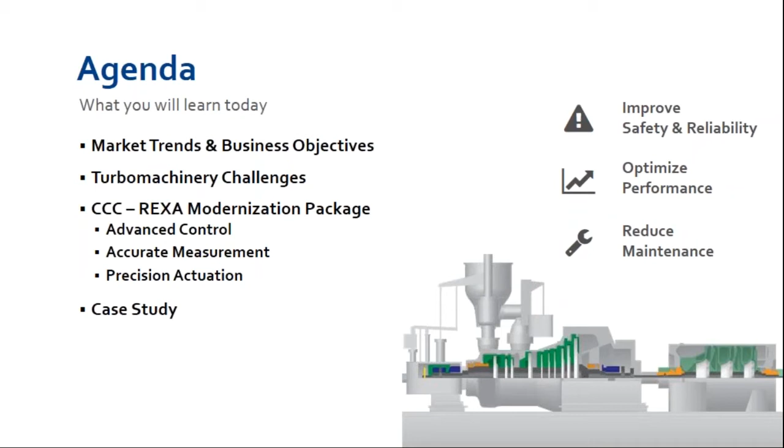Thanks, Mike. I'll start with the market background, and this is what we've all been experiencing, so it's just a bit of a summary. In today's volatile market, we've all been feeling the pain of lower oil prices for longer than before. Industry statistics are predicting that by 2020, half of the workforce will be retiring, and industry experts have even coined this as the great crew change.

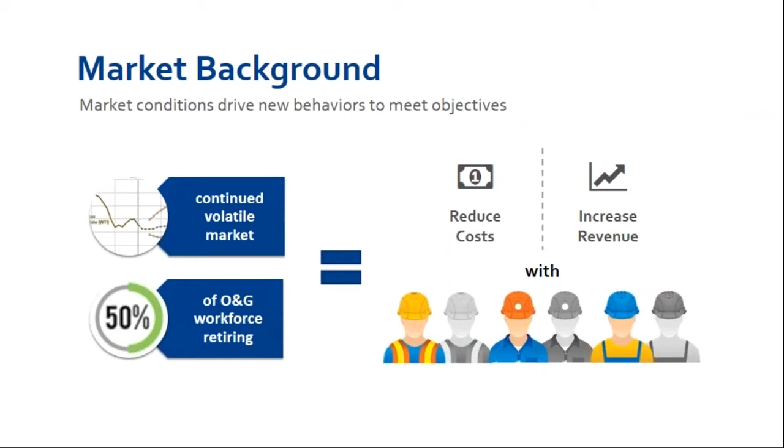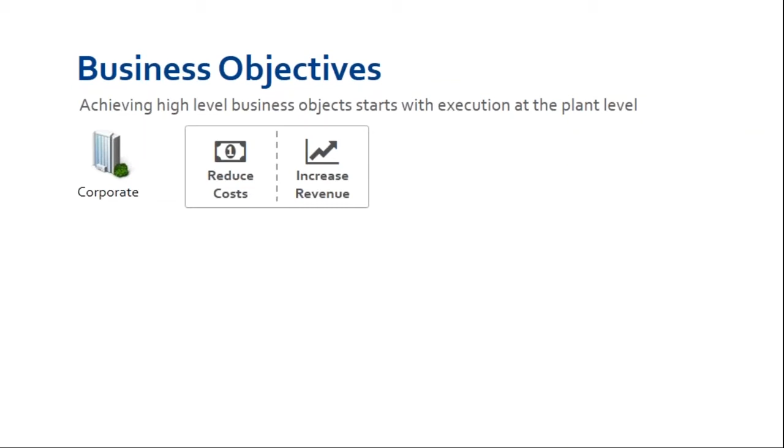So we're all challenged and tasked to do more with less. This means we have to be smart in the way we work so we can still achieve high-level business objectives with fewer people. The goal, of course, never changes, and that's always to be profitable. That means reducing costs and increasing revenue. Each plant sets their targets to improve, and that may vary depending on your industry, infrastructure, what type of standardization efforts have been in place, or even the age.

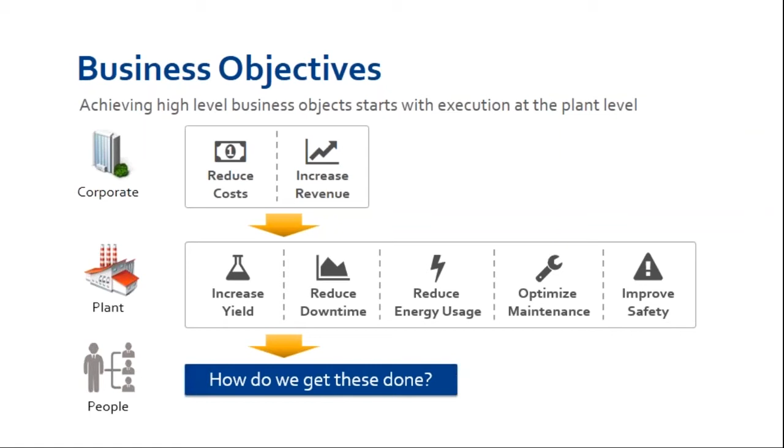So how you personally impact these goals in your daily job is what we'd like to focus on today in more technical detail. In the end, it's up to you, the people on the ground, to set priorities and execute these objectives. So in this webinar, we'll cover some strategies to achieve safer and more reliable operation and better performance while reducing maintenance. The focus, like Mike mentioned, is around some of the most critical equipment in your facility, and that is turbomachinery.

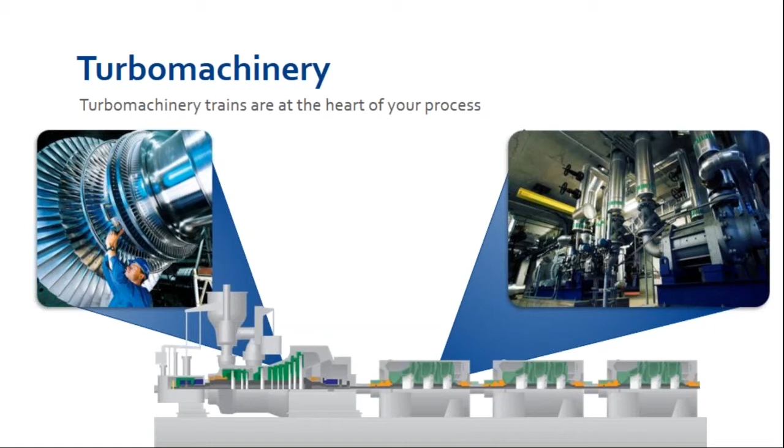To ground everyone before jumping into how to achieve your plant objectives, I'd like to define what we mean by turbomachinery. The train makes up both the driver and driven equipment. The driver could be a steam turbine, gas turbine, or a motor, and the driven equipment is typically a compressor, but it could also be a pump or a generator. Turbomachinery is at the heart of your process. Efficiency and availability of these machines directly impacts your bottom line.

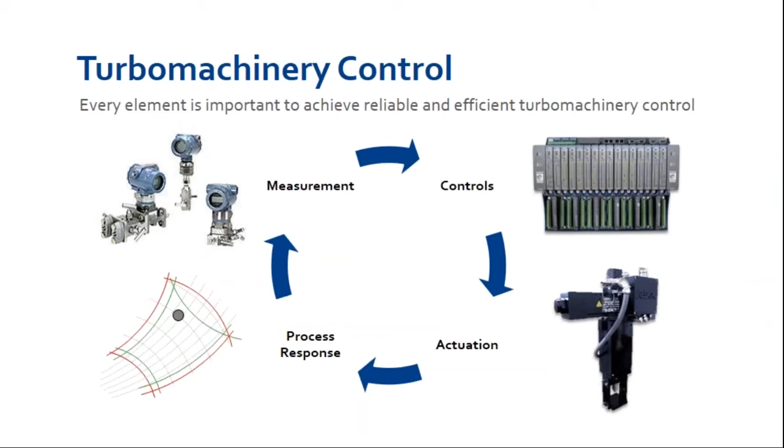Just like any control system, turbomachinery control consists of measurement, the control system itself, and the control element. A good turbomachinery control system keeps the process steady and provides protection to the machinery as well as the downstream processes in the event of an upset condition.

To understand the importance of these elements working together, think of this analogy: in a car driving down the road, you're taking in measurements between the lanes, the levels of gas and oil, the response of the tires on the road. The control system is analogous to your brain, making decisions about what to do next—do you step on the gas or slow down? The actuation responds just like pedals in a car, and they better work when you need them to in order to stay safe or get to your destination on time.

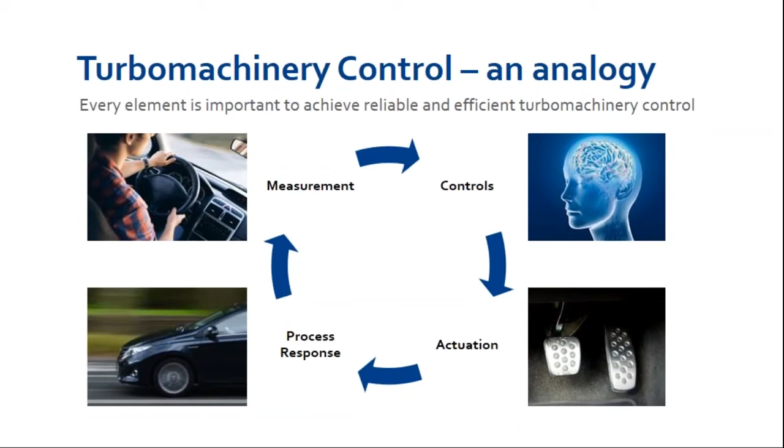The response of your car is the feedback from the process. Did your tires maintain traction? Did your speed increase when needed? Ultimately, did you stay on the road when the deer jumped in front of you, or did you have to pull over? These elements all work together, sometimes so fast you don't even think about it. The same is true for your turbomachinery control. Knowing where you need to go is the blueprint for how you design your system to work just the way you need it to.

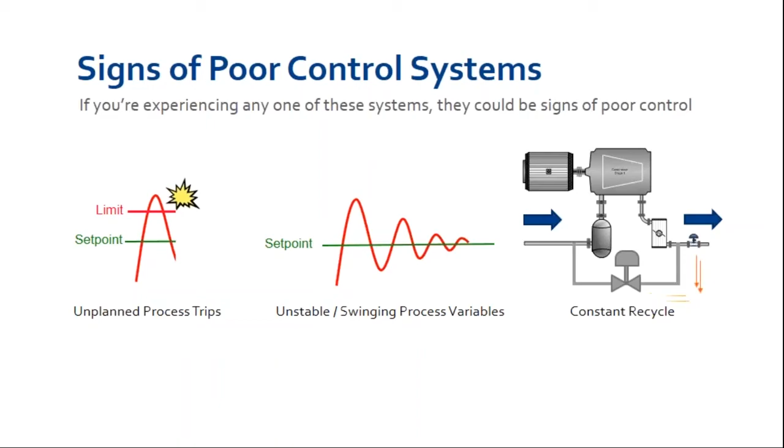Typical signs of poor control systems include unplanned process trips where specific limits are exceeded, unstable process variables when the set point can't be achieved quickly, and constant recycle. Addressing these conditions with turbomachinery control can lead to improved efficiency and availability. So how do we solve these challenges? We're going to dive into how REXA and CCC have teamed up to do just that.

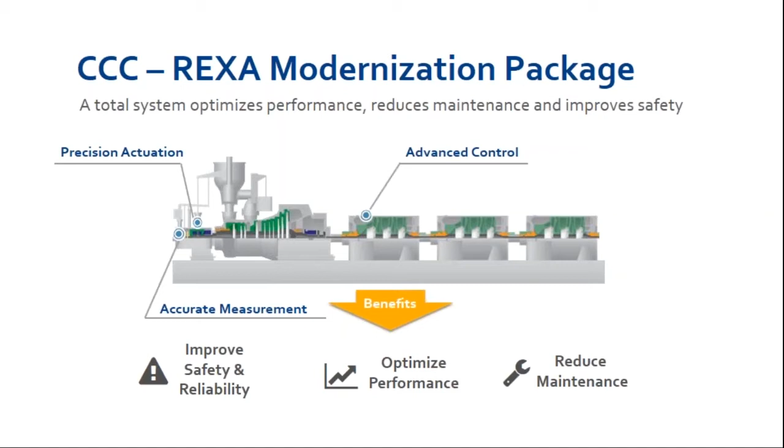The CCC-REXA modernization package ensures that all the critical turbomachinery control elements are working together seamlessly. We do this through advanced control, measurement, and precision actuation. Together, these technologies help you execute the plant priorities.

Starting with advanced control—this is the brains behind the turbomachinery control solution, just like our car analogy. Here is where you define how you need to operate to meet your plant objectives. By setting this up right, you can optimize performance in a number of ways: maximize availability, increase production, reduce energy costs, and automate startups. After reviewing the challenges associated with each objective, I'll also provide details on the key technologies required to get the results you need.

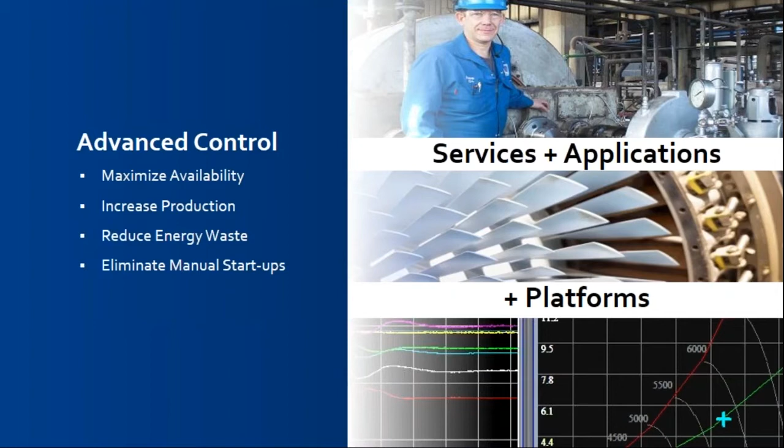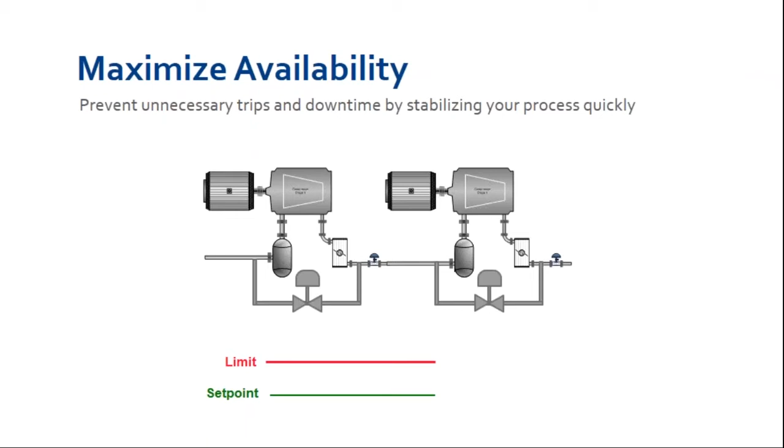Beginning with availability, it's important to understand the impact of tuning. Under-tuning or over-tuning systems can cause cascading trips in the process, leading to unplanned trips and low availability. Under-tuning typically generates slow and steady control, but could be too slow to respond to process disturbances, while over-tuning prioritizes quick response but compromises steady control and may even amplify disturbances. Getting this right is critical to maximize availability.

Here's an example of a disturbance affecting compressor operations. With general purpose control, shown here in red, the disturbance takes time to settle and has fairly high amplitude. This has two effects: the greater amplitude could result in a machine trip, for example, a high pressure limit being exceeded, and prolonged disturbances can create instability in the downstream processes. To minimize the amount of deviation from set point, a coordinated response of the anti-surge control, process control, and speed governor response is required.

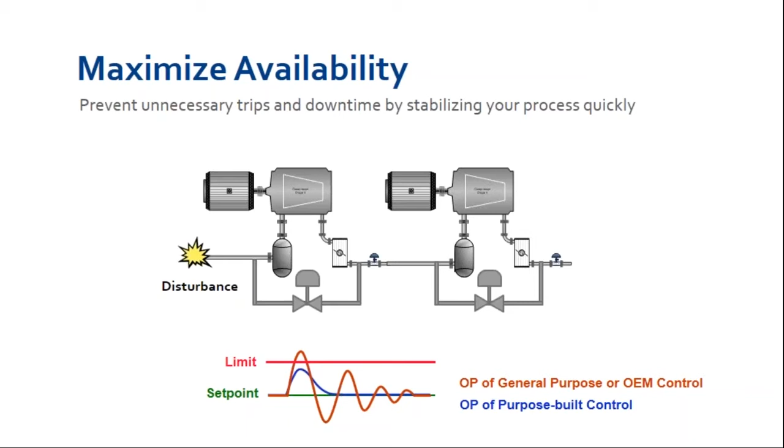A general purpose control system could take up to maybe 15 minutes to stabilize the process with large pressure swings. In contrast, a purpose-built turbomachinery control system can bring you back to set point within 2 to 5 minutes with a smaller amplitude, as you can see by the blue line in the process swing. This increases machine availability and minimizes downtime.

Not only does stable control allow you to keep your machine online longer, but it also helps you increase your yield. Consider the fluctuating flow of feedstocks—when the process is hunting for the set point, there will be unreactive chemicals creating unnecessary waste. With the confidence of stable control, the risk of exceeding limits is safely reduced, and your operating envelope can be expanded to truly optimize the set point limit for greater throughput.

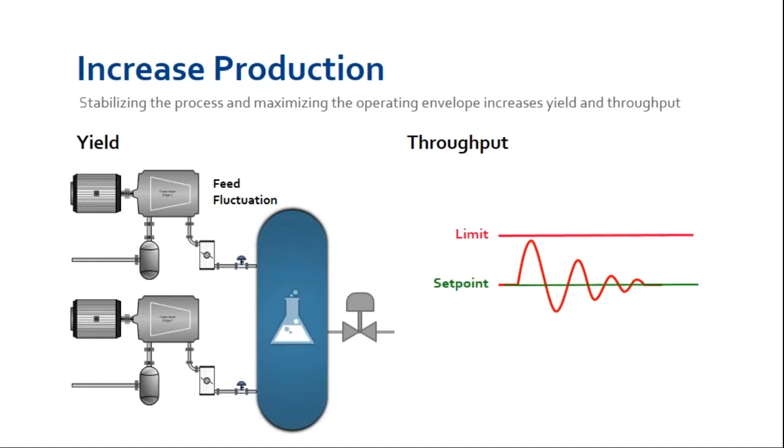To provide context, consider the compressor speed. We know that higher compressor speed equals increased throughput, but as time goes by, process resistance increases, such as intercooler fouling or hydrocarbon deposits in one or more compressor stages, and pressure limits require reduced compressor speed, ultimately lowering overall throughput. With a turbomachinery control solution, higher compressor speeds can be maintained by optimizing the set point limit for discharge pressure. You can see here there's a new set point limit and quantifiable payback, increasing your throughput.

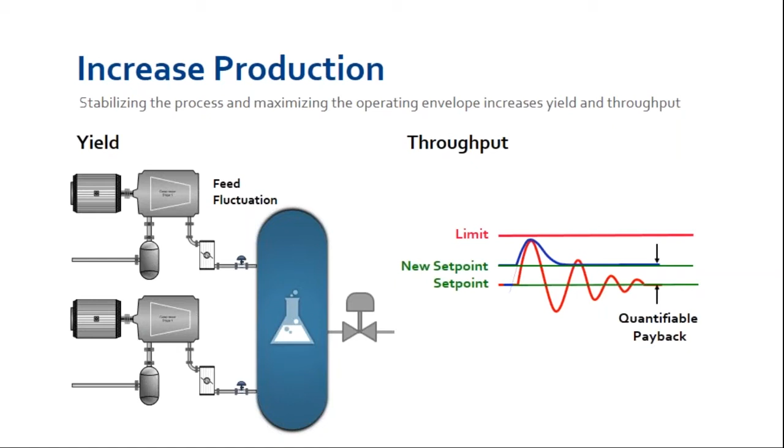Often we find that a wide control margin is used to compensate for slow controllers. With advanced controls, you can safely operate closer to the limit line, which means you have widened your compressor operating envelope. This enables you to close the control valve and eliminate energy waste. A good control system can match your energy consumption with your true production demands, all while providing reliable anti-surge control and protection.

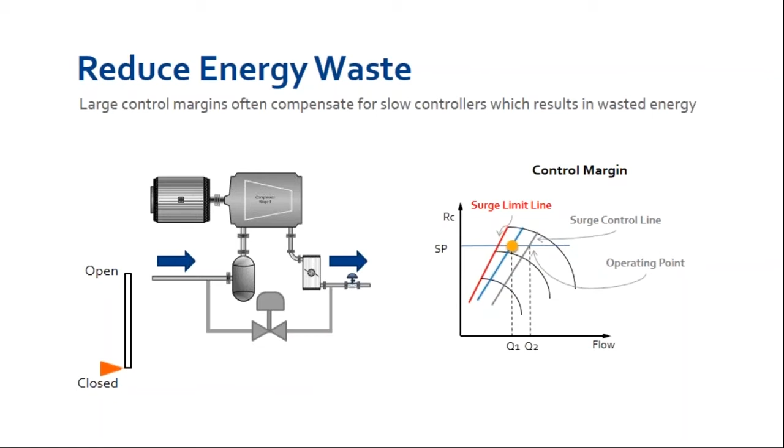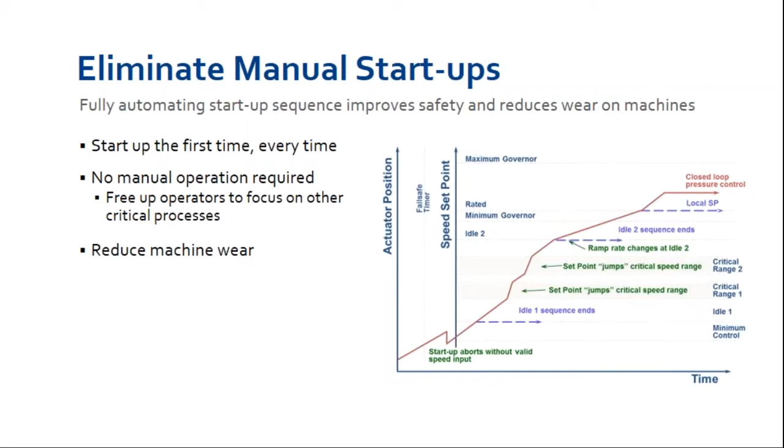Eliminating manual startups can really shorten your downtime by ensuring the machine startup works the first time and every time. By fully automating startup, you can be assured that the machine will follow the OEM startup sequence exactly as defined without any hiccups. This slide shows a typical startup curve. The digital speed controller can be activated from the control room to provide a complete automatic startup. By initiating a start command, we can ramp the turbine to idle 1 for a set timestamp, move quickly through multiple critical zones, on to idle 2, and finally to the rated speed value.

Now that we've covered some of the challenges addressed by advanced controls, I'd like to highlight some of the technologies that are key to realizing these benefits. First, we'll take a look at control applications.

Turbomachinery control is a highly specialized application. Successful implementation and ongoing support of these systems require intimate knowledge of instrument and controls, machinery, and the process. Many OEM solutions developed are one-off, where implementation has been performed by system integrators with poor documentation on what has been done. Such solutions can result in delayed commissioning, poor support, and even a compromise in performance. In order to minimize these risks and maximize economical gains for our customers, CCC has developed and maintained an extensive library of turbomachinery control applications.

Each application is meticulously standardized and refined through years of experience working with various end users and OEMs. Today, virtually any combination of a driver and driven equipment for any process can be implemented using our field-proven applications. This enables our engineers to focus on fine-tuning the system to adapt to your process, rather than spending valuable time on debugging. This is key to minimizing risks and maximizing performance gains.

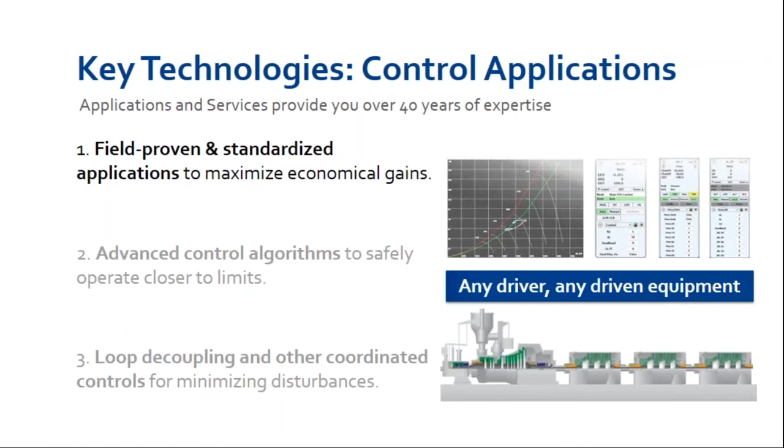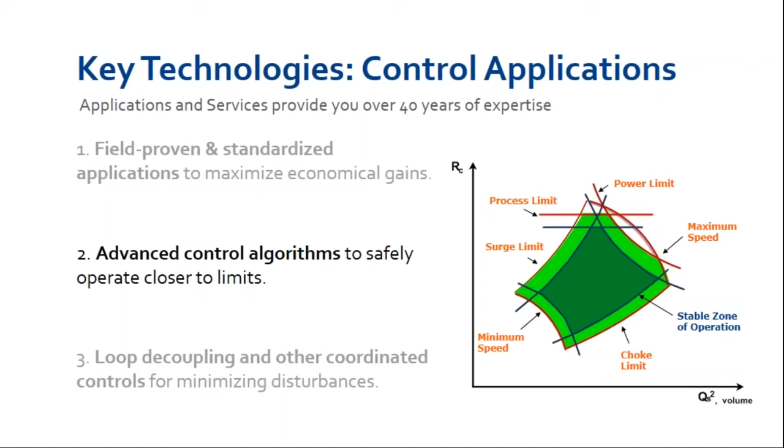Another critical aspect of control application technologies is its ability to safely operate the machine closer to limits. A turbomachinery train has various limits that define an operating envelope. A simple PID-based control system will limit the operating envelope, resulting in constrained performance. So let's take an example of overspeed avoidance algorithms to highlight how advanced control algorithms can maximize availability.

In this example, a steam turbine is driving a load, say a generator. When the load drops due to the reduction in electrical demands, the imbalance between the power provided by the driver and the power consumed by the driven equipment will cause the turbine to accelerate. A simple PID control system tuned for steady operations will easily reach the electronic overspeed set point, leading to a machine trip.

In order to avoid this undesired trip when there's a sudden change in load, the CCC steam turbine control application implements overspeed avoidance algorithms. These will close the governor valve quickly upon reaching the overspeed avoidance line, with the added open loop response. Once the overspeed trip is avoided, the PID loop will quickly and smoothly bring the speed back to the set point. Similar algorithms are found in control applications such as anti-surge, anti-choke, gas turbine, and load sharing controls, maximizing operating envelope and availability.

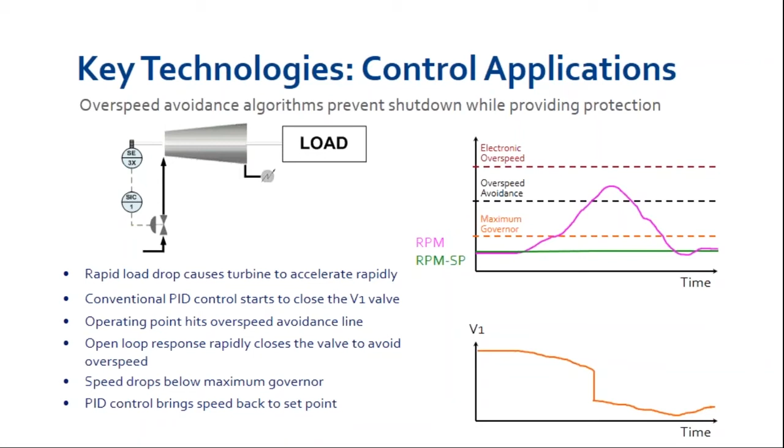Lastly, it is important to consider the challenge of resolving complex loop interactions. Turbomachinery controls involve very fast-acting loops that interact with one another. Consider the example of a steam turbine-driven compressor where the primary process variable is discharge pressure. When there is a disturbance upstream of the compressor, the anti-surge controller will open the recycle valve to prevent the compressor from surging. As a result, the discharge pressure will decrease and the suction pressure will rise rapidly. While this may keep the compressor from surging, it can introduce unsteadiness in the discharge pressure, which could result in propagation of the disturbance throughout the process. This is shown in red here.

Through coordinated controls between anti-surge controller, performance controller, and governor controller, these interactions can all be minimized. As the anti-surge controller begins to open the valve, it will feed forward the information to the performance controller, then to the governor controller, in anticipation of the pressure changes. The governor controller will automatically adjust the speed set point such that the disturbance to the downstream process is minimized. This is called loop decoupling, which is shown here in blue.

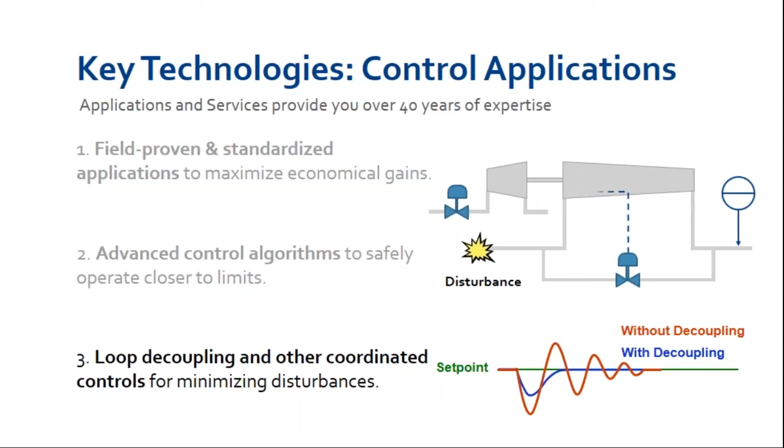Coordinated controls are critical to multi-stage compressor applications such as side stream compressors often found in refrigeration services. One of the most important keywords to look for when selecting your next turbomachinery control platform is deterministic loop execution. Turbomachinery control is a time-critical application where each loop must be executed precisely at a specified interval to produce fast and smooth control responses. In this environment where control loop interactions occur in milliseconds, the requirement to design and test the solution as an entire system is paramount.

By providing the entire control system, which includes hardware, software, and control applications, we're able to develop robust control solutions with global support like no other. If we think back to the car analogy, you wouldn't want to buy a Ford Fusion and try to swap out parts to make it a race car. Not that you can't, it just wouldn't compare to maybe your favorite sports car that's truly built for speed.

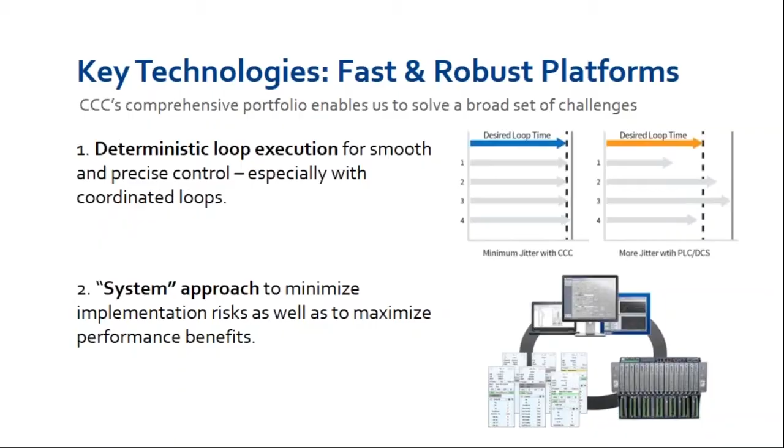The passive sensors are self-powered and use a built-in coil to generate a voltage as the gear tooth passes by. They can be used at distances up to 1,000 meters, and they're generally less expensive than active probes. Active probes are not self-powered and therefore require a 24-volt power supply source. They can be used to read speed at near 0 RPM and therefore make them a good choice for use on barring gear logic applications. Active probes are also more forgiving for all types of gear tooth shapes.

Accurately knowing your speed on the road ensures that you can make critical adjustments when needed. Even if you have the most advanced control and speed measurement, you're still going to need the final control element to do its job when called upon. And this is when I hand it over to Mike for more details about the importance of how precision actuation plays a critical role in the overall system.

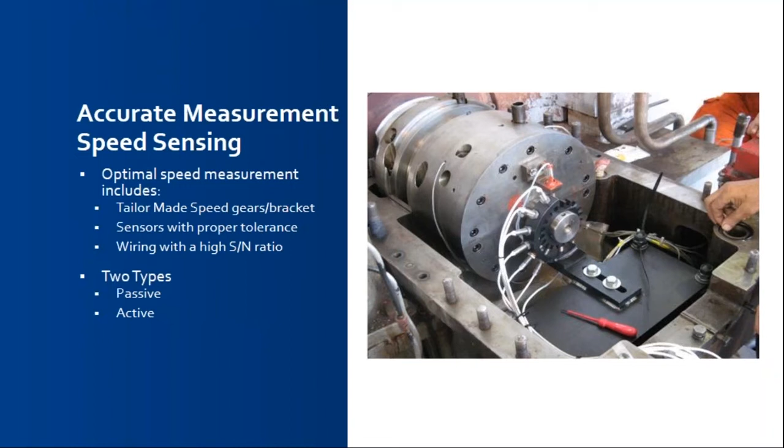Thanks, Emily. The next handful of slides will describe the importance of actuation precision as it relates to process controls. Many companies refer to the control valve as the final control element in a process loop. Although a properly sized control valve can eliminate cavitation and noise from a process, and the correct trim selection can extend trim life, a control valve is really just a variable orifice in a pipe. It's the actuator performance that truly provides the capability for finely tuned control.

In this section, we'll give a brief review of actuator technologies that can be commonly found in turbomachinery control applications, and will offer benefits and drawbacks associated with the various types. We will then review REXA actuation technology in detail and discuss the primary applications where REXA can be found and touch on some of the key benefits that can be recognized by the plant.

So there are three primary types of actuator technologies on the market. You have pneumatic, electromechanical or electric actuation, and hydraulic actuation. Each uses a different method to develop forces to create motion, all with advantages and disadvantages. We will spend a few minutes to discuss the benefits and drawbacks of each technology.

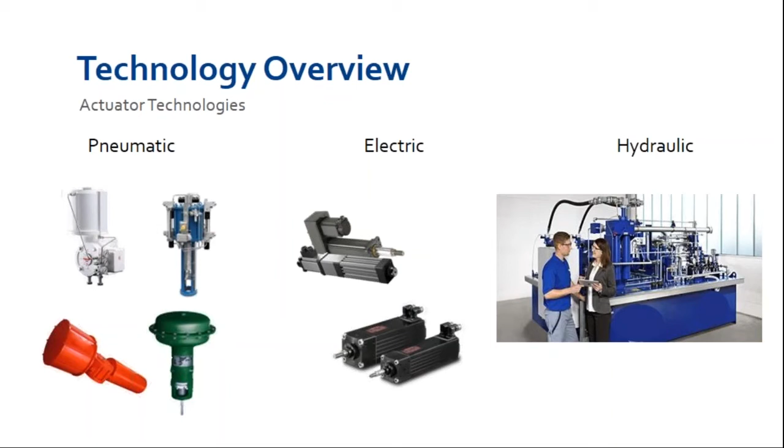So let's first spend a few minutes discussing pneumatic actuators. Pneumatically driven devices are the most common found in any processing plant. Linear pneumatic actuators are typically either the spring and diaphragm or piston type of design. For rotary applications, it's common to find both Scotch yoke and rack and pinion designs.

For the purpose of our conversation regarding rotating equipment, you'll most likely find small piston type actuators controlling pilot valves on steam turbines or larger piston actuators controlling anti-surge valves. Pneumatics have an advantage in that they are low cost and easy to repair, and they're a standard for most industrial maintenance departments. However, there are major performance limitations with this type of actuation because air is a compressible medium, making pneumatics subject to Boyle's law.

Boyle's law simply states that the pressure of a gas is inversely proportional to its volume in a closed system. So in our actuator example, once the force of static friction has been overcome and the movement is initiated, the pressure required to keep the actuator moving is instantaneously and dramatically reduced. If the pressure is dramatically reduced, then you guessed it, the volume is dramatically increased.

So the actuator is now subject to jump and overshoot due to the excess volume of air required to move in the closed actuator system. This results in hysteresis and instability. So when does this occur? This occurs every time the valve is required to move to a new position.

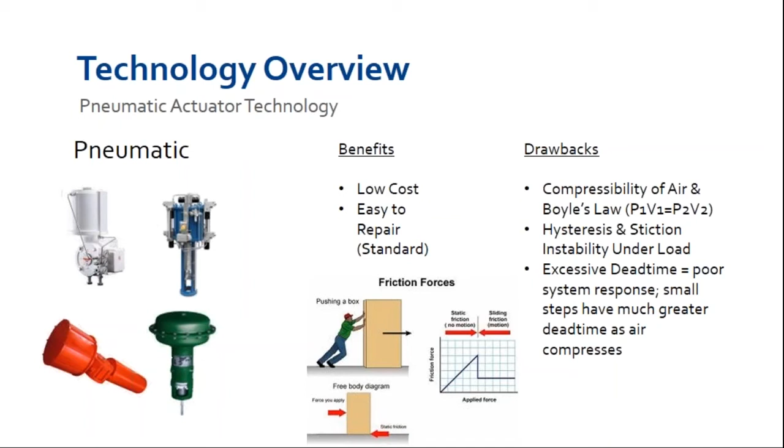Onto electric actuator technology. As it relates to turbine control, when we're discussing electromechanical actuation, we are considering electric servo motors driving a planetary gear or a ball screw. These are also typically found on pilot valve applications, but sometimes can be found directly driving the governor valve or rack assembly if the force required is small enough. Electromechanical actuators are capable of providing faster speeds, tighter control, and better frequency response than pneumatics.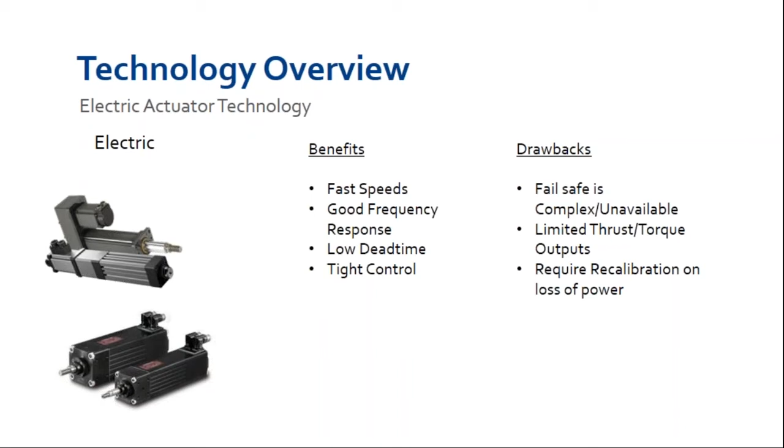There are, however, more than a few drawbacks with these actuators. The failsafe is complex or even unavailable in most cases. The thrust and torque outputs are limited to lower loads, and the electrical interface for these actuators is not particularly well developed. Many of the current actuators on the market have the added drawback that if they lose power in operation, once the power returns, they are required to stroke to the end of travel in order to recalibrate their set point position. This is a very undesirable characteristic for steam turbine control.

And finally, hydraulically driven actuation. Hydraulic actuation is the standard in applications that require high performance and premium control. The technology has been the standard for rotating equipment applications from the beginning. Hydraulics offer high speeds, high resolution, high frequency response, low dead time, and the ability to configure for fail-safe capability.

These benefits come with some compromises. Traditional hydraulic systems are expensive, complex, have high oil volumes, and require a good amount of maintenance. So let's discuss a typical HPU-based electrohydraulic circuit.

The construction for these systems are basically all the same. All of these hydraulic systems utilize an oil tank or a reservoir and have continuously running motors and pumps that create a constant oil pressure. They utilize servo or proportional valves to drive the associated steam valves. The continuous circulation of oil generates a heat rise, which accelerates the tarnishing of the hydraulic fluid.

So let's talk in a little greater detail about oil maintenance. Oil cleanliness is the real battle that we're discussing as it relates to electrohydraulic systems. Over 80% of hydraulic failures in HPU systems originate from the breakdown of the hydraulic fluid. Communication with the atmosphere allows for moisture ingress into the system, which directly leads to acid buildup. Oxidation occurs due to system heat rise. Particulate matter in the system is increased as oil deterioration accelerates. All of these systems are ultra-sensitive to oil degradation, and all of the systems are inherently dirty.

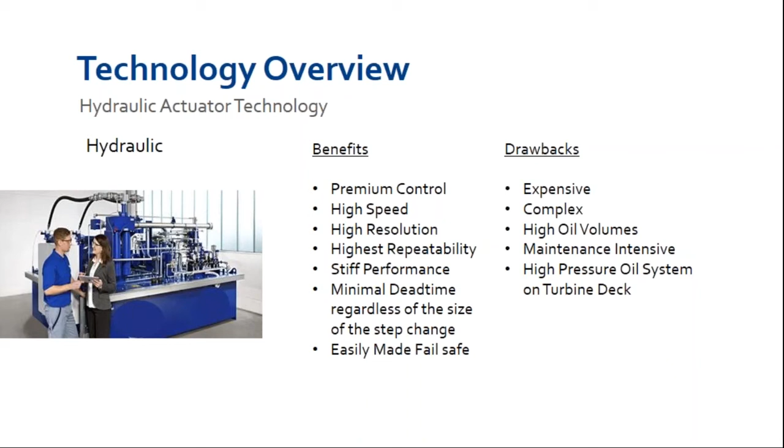So now the focus is on implementing systems to maintain the requirement of oil to ultra-clean levels. These systems are complex fluid filtration systems which are expensive to procure and even more so to maintain. Oil sampling, filter maintenance and replacement, oil flushing, and oil replacement are required to be done at high frequency for proper equipment operation and maximum uptime.

Which brings us to the unique design of the Rexa Electraulic actuator. Originally conceived in the 1980s, Rexa actuation has been upgrading traditional HPU-based hydraulic technology for almost 30 years. The major points for Rexa: we have a hermetically sealed ultra-low oil volume power module, typically reducing anywhere from 95 to 99% of the oil in the system in comparison to a traditional HPU. We have no filters and require no oil monitoring or oil changes as part of a preventative maintenance plan.

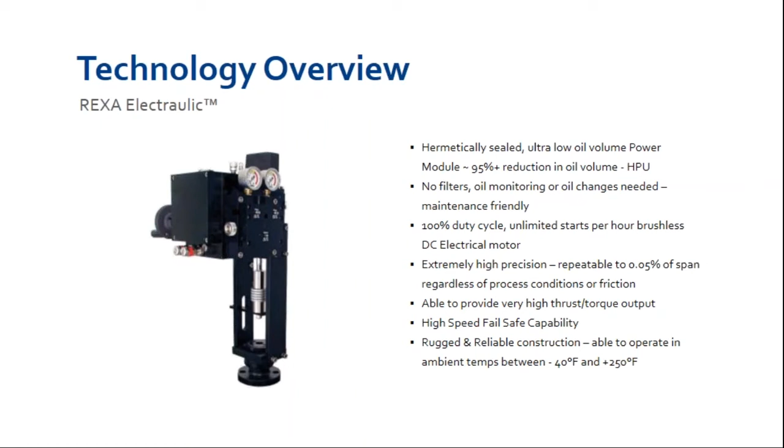We have a 100% duty cycle, unlimited starts and stops per hour due to our brushless DC electrical motor. The device is extremely high precision, repeatable to 0.05% of span, regardless of the process conditions or the friction involved. We're able to provide very high thrust and torque outputs and high-speed fail-safe capability. And we have rugged, reliable construction, able to operate in temperature ranges from -40 to 250 degrees Fahrenheit.

So how does it work? The Rexa technology consists of two primary components, the electrical subassembly and the mechanical subassembly. The electrical subassembly is the positioner for the actuator. This is where the main power supply and control signal are brought to the unit, and also where a 4 to 20 milliamp position feedback is available to be sent back to the CCC controller.

The mechanical subassembly is attached to the driven device, typically a control valve or perhaps a steam governor rack or bar assembly. The Rexa actuator is a closed-loop system, which is different from other technologies that require an external feedback, typically in the form of an LVDT or an RVDT to close the loop. As such, the Rexa technology has both a motor power cable and a feedback signal cable interconnecting the two subassemblies.

In the Rexa electrical subassembly, there is a configurable deadband parameter that can be set as low as 0.05%. When the CCC controller requests the set point to move outside of the Rexa configured deadband parameter range, oil is pumped from one side of the cylinder to the other side of the cylinder to facilitate valve motion. The actual cylinder position is continually fed back to the electrical subassembly. Once the target position is reached, the motor is de-energized and the unit holds position until the next signal change command is initiated.

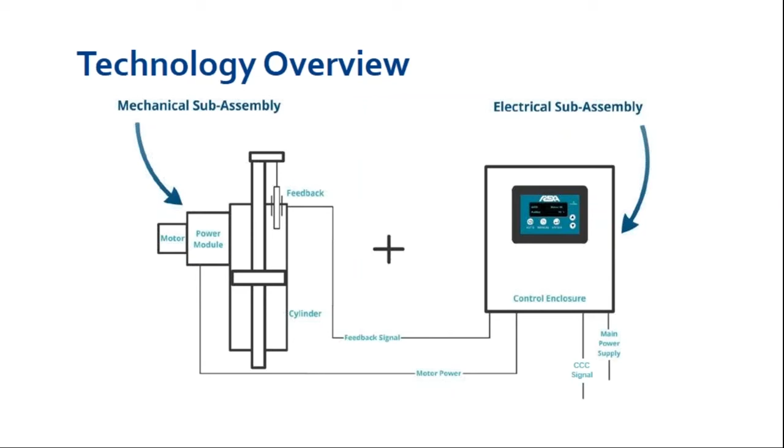So let's take a closer look at the Rexa hydraulic circuit. This is the real area of differentiation with our technology in comparison to other HPU-based systems. The centerpiece of Rexa Electraulic circuit is our bidirectional gear pump, which is coupled to the Rexa brushless motor. The gear pump works in conjunction with our flow match valve, which is designated as FMV1 and FMV2 on the schematic. It's important to note from a size perspective that the flow match valve containing FMV1 and FMV2 and the gear pump can each be held in the palm of your hand. It's a very small system.

When the actuator is at the desired position, the spring-loaded ball checks are in place to prevent flow of oil through the flow match valve. What allows the oil to travel from one side of the cylinder to the other is the bidirectional gear pump. When there is a signal change, the motor activates, turning the pump, which instantaneously builds pressure, allowing the ball checks to open. Oil is then transferred through the flow match valve from one side of the cylinder to the other. Once the actuator has reached its desired set point, the motor stops and the ball checks are seated, restricting the flow of oil through the system.

The motor is a brushless servo motor designed for 100% duty cycle and capable of very high frequency response, greater than 5 Hertz. The cylinders we use are dual rod cylinders, so the oil volume exiting one side of the cylinder equals the volume entering the other side. This design eliminates both the need for an external reservoir and the need for continuously circulating oil through the system.

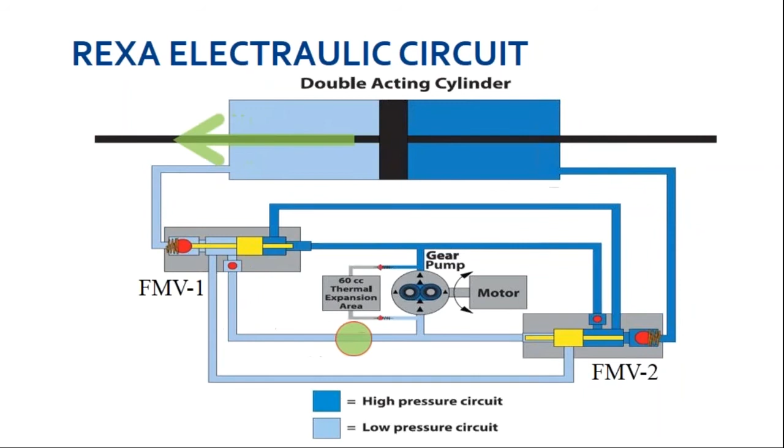As we discussed previously in the presentation, there are a couple of ideal applications where Rexa technology can be used to the plant's immediate advantage: steam turbine governor control and anti-surge valve control.

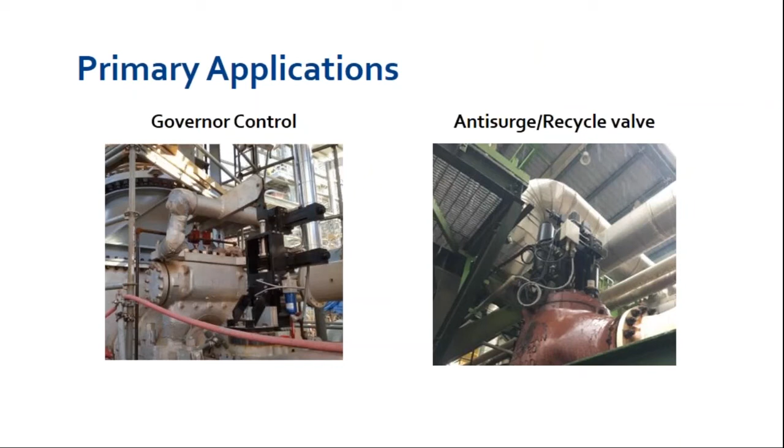Steam turbine governor control is the first application that warrants some discussion. There are a multitude of antiquated steam turbines in the industrial process market right now, with either mechanical flyball type controls, or perhaps they've been upgraded to electronic controls, but they're still relying on hydraulic systems where oil degradation greatly affects performance.

The steam turbine governor controls the steam load into the turbine casing through either a control valve external to the steam turbine or through shell-mounted control valves that could be connected to a bar or rack assembly. The steam turbine itself is there as the driver for the compressor, to regulate the compressor's rotational speed.

The impact of poor control in a governor application creates speed instability with the turbine, as Emily was discussing earlier. Speed instability causes inefficiencies with both the turbine and compressor operation and can cause unwanted trip events, resulting in downtime of the entire train. Speed instability can also cause the unit to be run at higher speeds than necessary to try to mitigate the result of swinging RPM.

Rexa has both linear and rotary solutions available for this application.

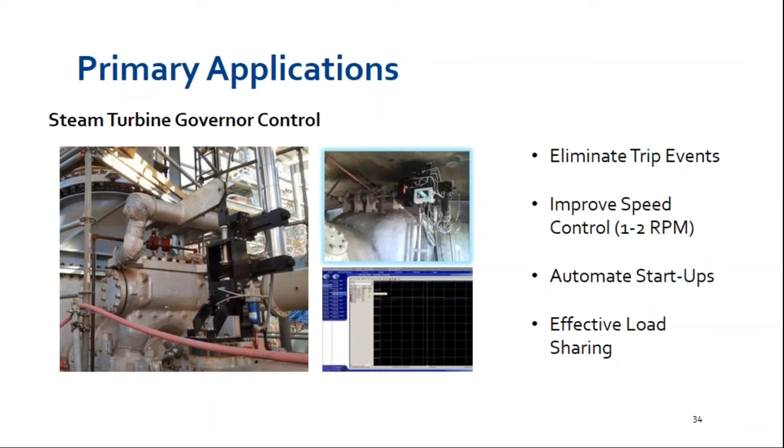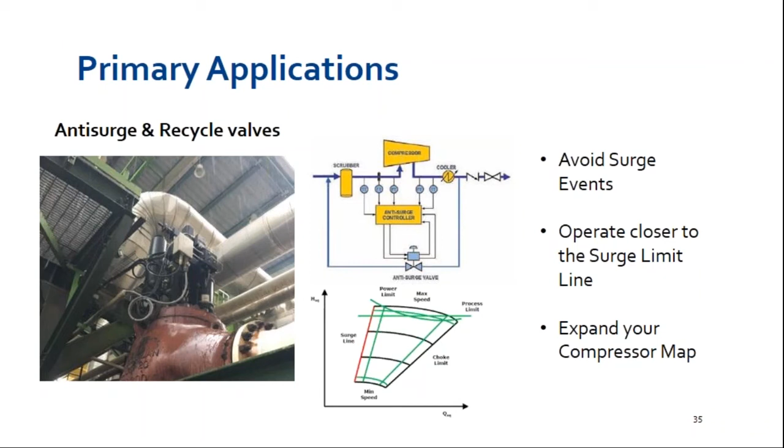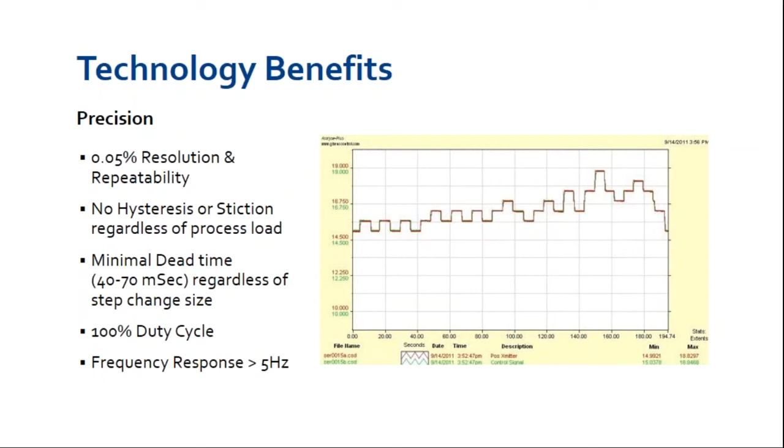So just recapping some of the technology benefits with Rexa, the main one is precision of control. 0.05% resolution and repeatability, which is typical of a hydraulic system that's working properly, but much tighter than pneumatic or electric capabilities. No hysteresis or stiction, regardless of the process load. Minimal dead time, the process engineer's worst enemy, regardless of the step change size. Whether we're looking at a 0.05% step or a 5% step, our dead time's consistent. And 100% duty cycle with high frequency response greater than 5 Hertz, which is important for rotating equipment applications.

The other major benefits are with respect to reduced maintenance. And this is really where the hydraulics come into play, because hydraulic control operating the way it's supposed to operate is very similar to Rexa. The issue is trying to keep the oil clean. We don't have to deal with that. We eliminate a high-pressure system, control oil system, and HPU and reservoir at the turbine deck. We have no oil-based maintenance required with Rexa at all. The total system oil is reduced by greater than 95%, and we use 5W50 synthetic motor oil. We don't have a specialized hydraulic fluid because our volumes are so small and we're not circulating oil. We don't require a fire retardant type of oil that's difficult and expensive to handle.

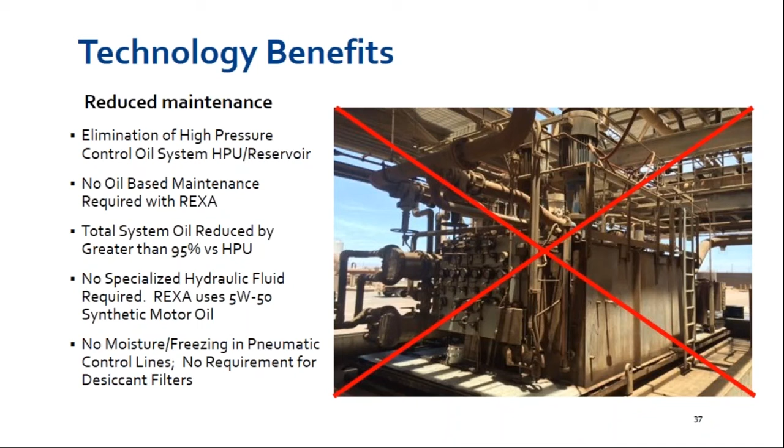And in comparison to pneumatics, you don't have to worry about moisture or freezing in pneumatic control lines, and you don't have any requirement for desiccant filters. So there's a lot of advantages with our technology, regardless of who you're looking at as the competition.

In short, we deliver results. So at this point, the actuator overview is complete, and I'd like to turn it back over to Emily to finish the presentation. Yep, thank you, Mike.

We've highlighted some of the key challenges surrounding typical turbomachinery controls and how they can be resolved through advanced control, accurate measurements, and lastly, Mike just went through precision actuation. To help you address plant objectives, we hope we've provided enough insight into the CCC Rexa modernization package to really help you understand how we can work together to achieve more with less.

I'm excited to introduce a guest speaker we have, Dave Nelson, one of our senior engineers at CCC. He will be sharing a recent case study that's a great real-world example of what we have discussed today.

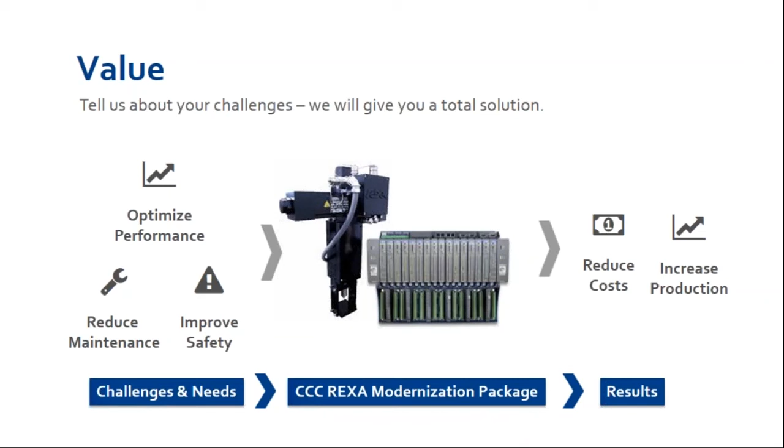Thank you, Emily, for the kind introduction. And hello again, my name is Dave Nelson. I am an engineer in the Mechanical Retrofit Department at Compressor Controls Corporation. This case study was implemented at a US-based refinery. The project involved replacing the OEM hydraulic actuator that modulates the steam inlet control rack of a turbine-driven air blower.

Now let's take a moment to look at some of the customer's challenges. This steam turbine-driven air blower exhibited everyday RPM swings at around 100 to 200 RPMs, and at times they were as high as 500 to 600 RPMs. Manual control was the only way that the turbine would respond to a change in the speed set point.

Also, dirty oil in the oil system caused the hydraulic actuator to stick and operate poorly due to contamination and varnishing of the internal components. There were also prominent oil leaks around the area of the OEM actuator pilot and power piston that were deemed unsafe, costly, and environmentally hard to contain.

Another challenge was that the airflow between the problematic unit and a shared machine was unstable, and the operators were forced to make changes to the airflow by manually adjusting the blow-off valve. This resulted in a wasted energy loss to the process.

Now here was our mechanical retrofit solution. The customer contacted Compressor Controls Corporation to discuss a possible solution. We shared knowledge of the REXA actuator as a proven technology to solve the problems at their site. A REXA product demonstration was held at the customer site, and shortly after, we received a PO to implement the solution. The actuator was properly engineered, sized, and placed on order.